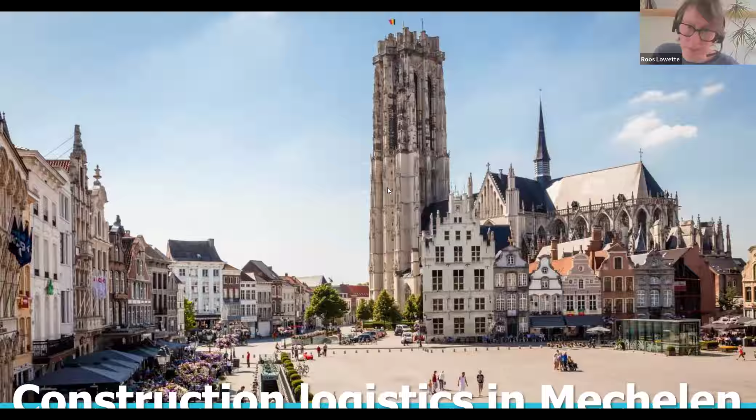Thanks everyone for being here. Esmée and I, we will be talking about construction logistics in the city of Mechelen.

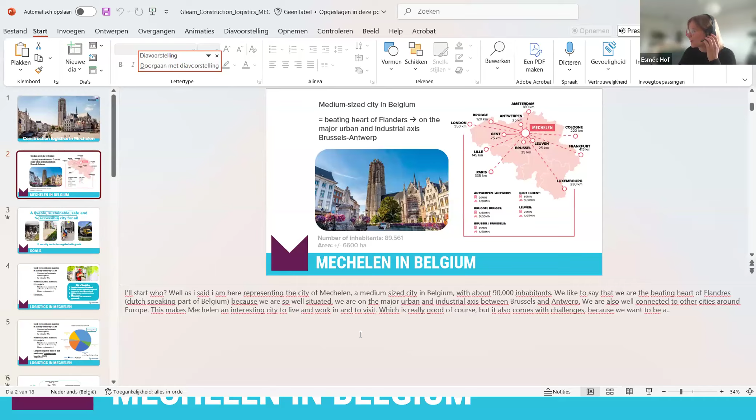You're seeing not the presentation mode right now, are you? I think it's slightly bigger than the screen, so it might not be presentation mode. Let's see. This should be it, right? Now it is, yes. Perfect. Let me first tell you a little bit about Mechelen. It's a medium-sized city in Belgium. We have around 90,000 inhabitants. As you can see, we are situated in the middle of Roos, Flanders. We don't see Roos, we don't see the next slide. We see the first page still. Oh, you do? That's strange. Because I see the slides that I'm talking about. Maybe try sharing it again. Do you see it changing now? Yes. Okay. Yes. So as you can see, we are situated in the middle of Flanders, the Dutch-speaking part. We don't see the presentation mode. We're also sorry. We see the really? Yeah, that's good. Okay. That's sorry for this. Let me stop sharing and start over again. Should I share the screen? That's also fine.

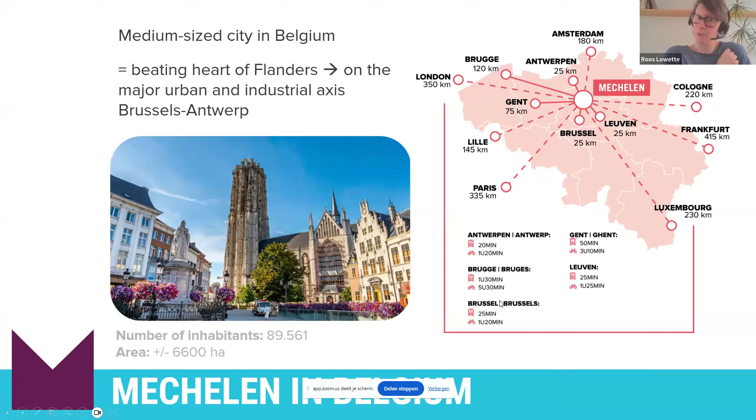In any case, we are on the major urban and industrial axis between Brussels and Antwerp. And as you can see, also well connected to other cities, not only within Belgium, but around Europe, which makes Mechelen quite an interesting city to live and work in and to visit, which is nice, but it also comes with challenges. Because as you see, we want to be a livable, sustainable, safe, accessible city, but it's not always easy to find the right balance because at the same time, we also want to have new buildings. We want people to be able to have a drink on our main square. We want people to be able to do shopping. So a lot of goods need to be supplied as well.

Yes, Esmée. So that's why in Mechelen we focus quite a lot on sustainable urban logistics. And we have as a city a goal to have zero emission logistics in our city center by 2030. And we have a main focus so far on e-commerce and the delivery of restaurants. Through European projects, we try to make these logistic streams more sustainable. And we do so by trying to avoid the kilometers, as you can see, shift those kilometers that cannot be avoided to more sustainable modes of transport. Ideally, shift them to zero emission vehicles. And we want to stay connected with all stakeholders that are involved in this process.

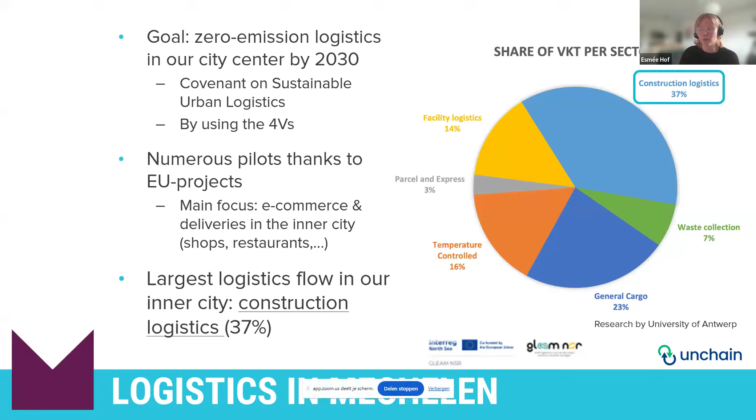However, when we look, well, we noticed in the data that a lot of logistics entering our city could be attributed to construction logistics. So, as you can see on the pie chart on the right, about 40% of all kilometers traveled in our inner city can be linked to construction logistics. So as Roos said, we've done a lot of pilots focused on e-commerce and deliveries in the inner city. However, within construction logistics, we did not have a lot of context, and that's why we are focusing on it. Because it's a large portion of logistics in our inner city, we also, of course, see the impacts of construction logistics. Again, a few data.

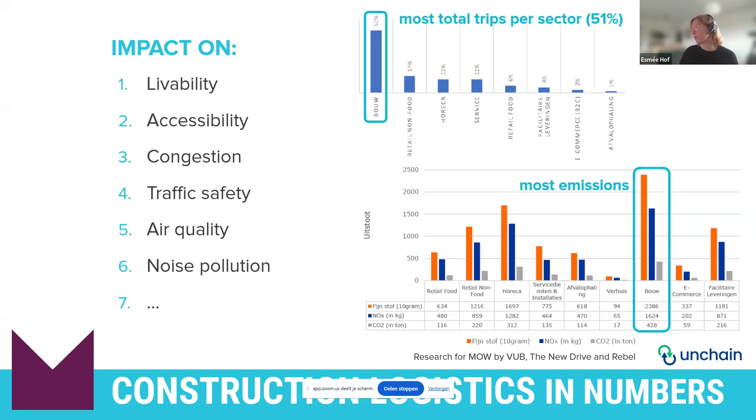We see a lot of trips can be attributed to construction, and as a result, also a large part of the emissions in our inner city are linked to construction. It has an impact on livability, accessibility, congestion, traffic safety, air quality, and noise pollution, among others.

When we look at some examples in Mechelen, just some photos that we took, you can see that often construction materials are stored on the public domain, which is not often a big problem, it's just a bit of a messier look to our city. But as you can see in the example in the middle, you see goods and a van stored on the sidewalk.

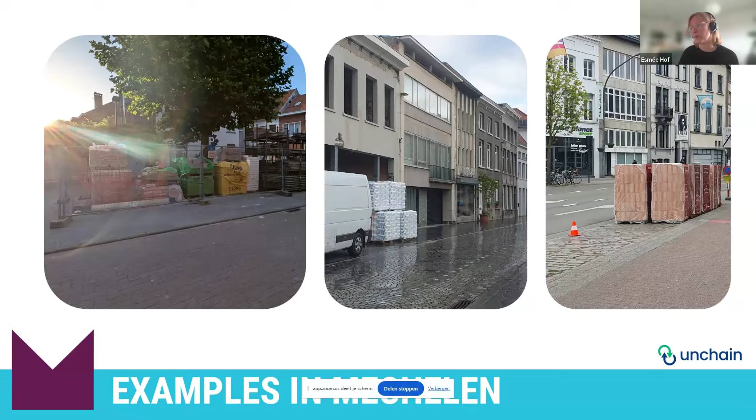Of course, if you don't have any problems moving around, that's maybe just a bit of nuisance. But you can imagine someone in a wheelchair or someone with a stroller has to go out of their way to avoid those materials. Also with loading and unloading, we see that it causes some obstructions.

You can see the same road here again. It's one of the main roads going into our city, which can be quite busy and is quite small as well. We have a very historical medieval city center. And you can see in both instances that the cyclist and the pedestrian has to move in favor of the deliveries being made in traffic. Of course these goods have to be delivered, but we feel like there has to be another way to make it also more safe for pedestrians and cyclists.

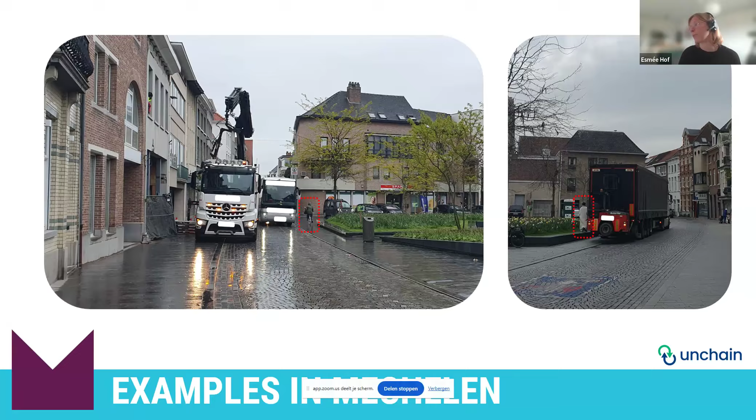However, the construction sector is, of course, essential to a city. In our spatial policy plan, we have written that we want to facilitate a strong growth in urban housing supply. So as Roos said, we have about 90,000 inhabitants right now, but we consider a future with 120,000 inhabitants a possibility. And that means, of course, that we have to have additional housing, but also additional facilities like shops, sporting centers, supermarkets.

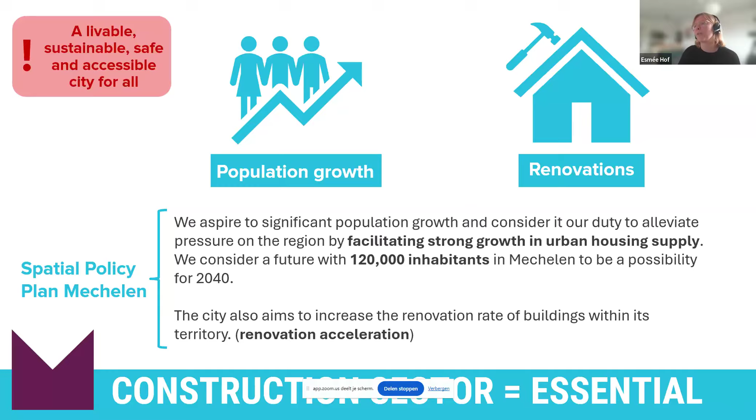And of course, we also want to increase the renovation rate of buildings within our city, so renovation acceleration. And all this means, of course, also more construction logistics in our city. But the question, of course, remains: how do we keep this balance between this construction logistics that has to happen, and a livable, sustainable, safe, and accessible city for all?

And thanks to 2 European projects, we are able to try to find a solution. There is Unchain and there is GLEAM. And they both help us as a city to investigate the construction logistics reality. Who are the companies in the construction business? What do they do? What do they need? Where do they come from? How do they enter the city?

Within Unchain, we launched a survey and we held 2 workshops with local contractors, interest groups, and construction retailers. And what we found out was that these companies are currently focusing mostly on more sustainable passenger transport, so for their employees, but that they still need to make significant steps to make the construction transport itself and the construction machinery more sustainable. They mentioned high costs and a lack of space as main bottlenecks currently.

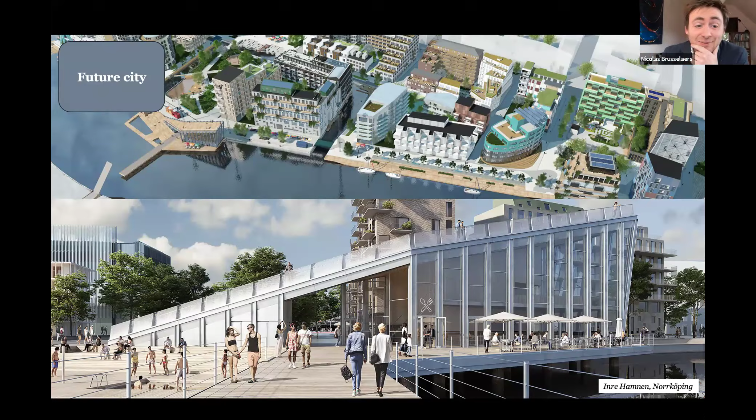However, during the works, construction logistics is inevitable, and that's then the less sexy picture that you typically see, which has an impact not only at the site itself, but on multiple layers around the site and the city as a whole, leading to vast amounts of disturbances, congestion, air pollution, and so on.

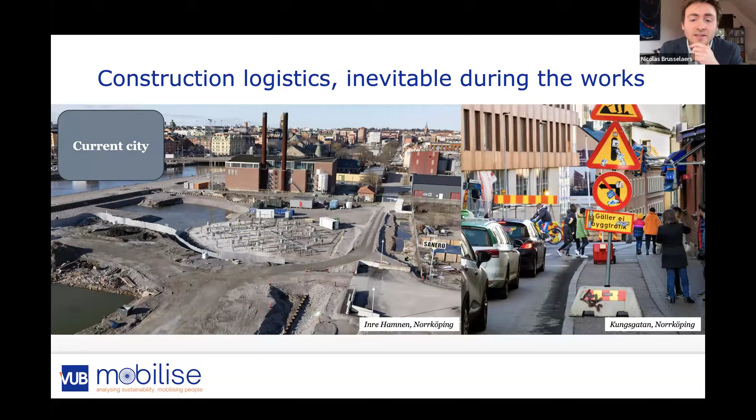And like you also already mentioned, that problem is further amplified the more simultaneous projects are running in a city. Cities typically focus on the current problems and the future state that they want to achieve, but in this transition phase we still have a term that we coined the planning gap. How do we reach that future state?

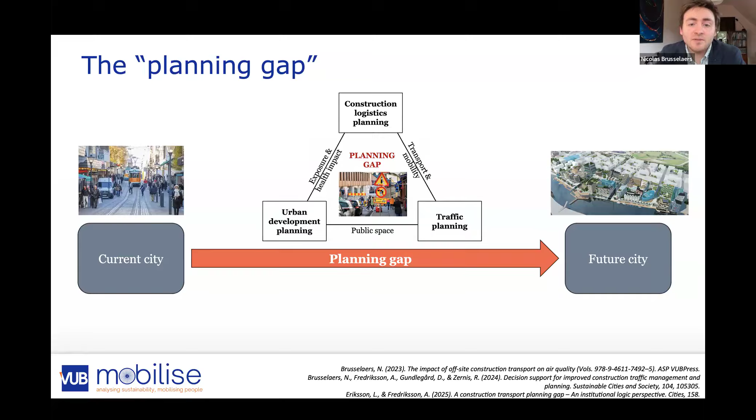I organized this presentation around three pillars leading to that planning gap, namely construction transport planning, traffic planning, and urban development planning. Without a profound understanding of how to solve this planning gap, it seems next to impossible to reach the targets set by 2030. So let's open together the three data sets that we used for our research in the last few years, starting with the one on construction transport planning.

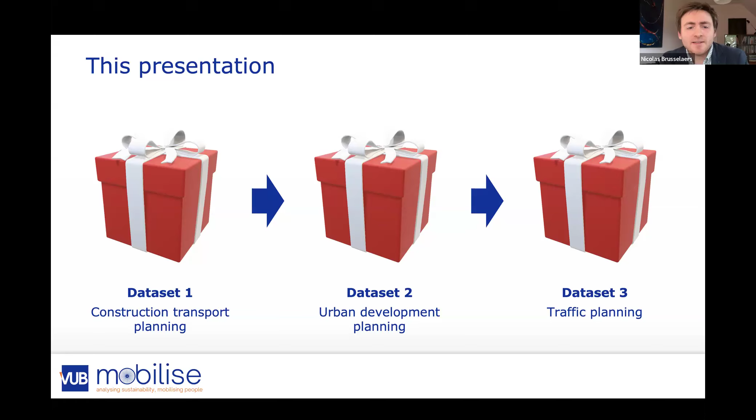So we got our hands on the onboard unit data set - GPS trackers that were implemented in Belgium in 2016, if I'm not mistaken, for taxation reasons, for the kilometer charge. That is a tremendous data set, collecting a lot of calculation variables on the vehicle type, the Euro norm, and so on, and a location every 30 seconds for every truck that is driving in or through the country of Belgium.

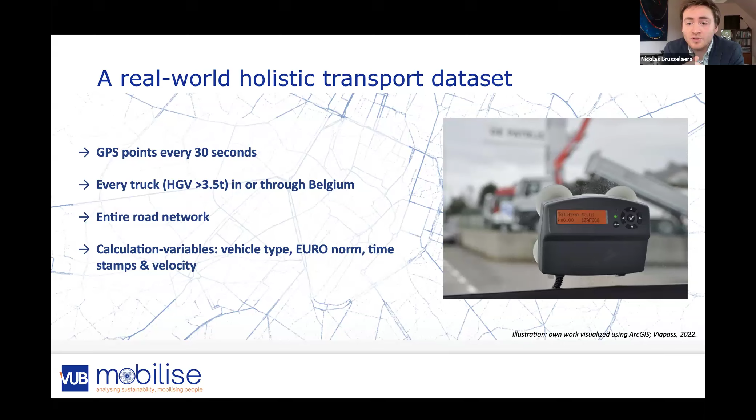And so with a bit of algorithmic development, we can see where each truck is driving in the entire country of Belgium and then translate that to a sustainability assessment, especially with regards to the transport sector.

And here we did the analysis for the city of Brussels, and we saw that in fact over a quarter of all the trucks, all the vehicles over 3.5 tons that are driving in or through the city are related to construction, carrying a massive burden, a massive impact.

We are speaking here about 45,000 euro of daily external costs, or over 1 million monthly. And it's still a sector that is heavily reliant on heavy truck trailers, so in the segment of 34 to 50 ton.

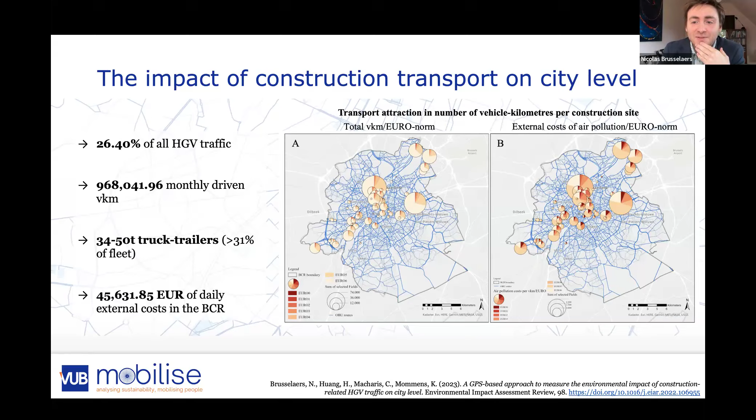We can pull this analysis also on the national level, and we see similar results: 1.5 million in external costs daily engendered by the construction transport sector. So that is a bit what we know.

Now, if we combine it with something else, with urban development planning data sets that we also have, we collected more than 200,000 construction and renovation site records in the city of Brussels. We created a proxy on neighborhood level for construction material demand, which we used to calculate optimal

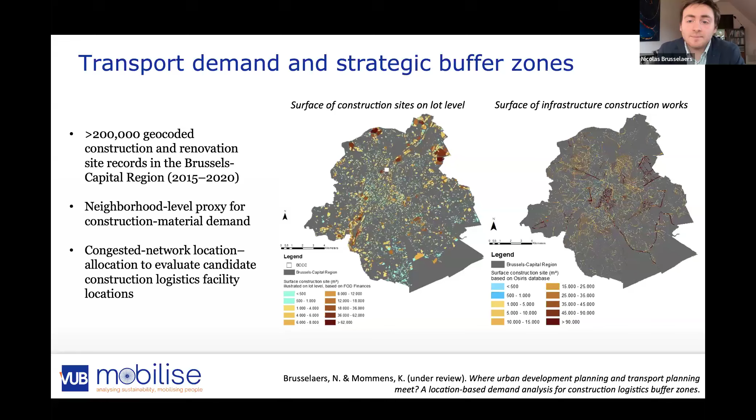strategic buffer zones or logistics facilities to optimize transport flows in and through the city. This led to a location analysis for logistics facilities, for one construction consolidation center, or two, or three, or four - strategic buffer zones where material demand will be highest and where it would be smart to position such a consolidation center.

And by the way, you see here that the white dot is the first construction consolidation center implemented by Mark a few years ago, and that is very close to the optimal point that we also reached in our analysis. Something that can also drive certain industry and policy decisions.

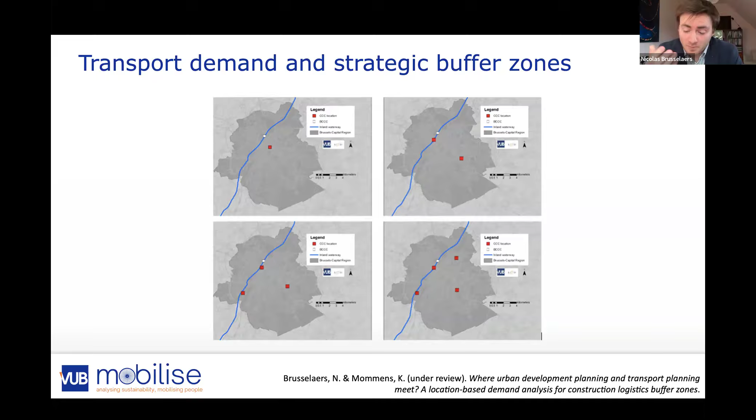Now regarding that, because we are talking about historic data, it would be nice to have an idea of future demand, which currently is quite complex because of the variables that influence transport demand and construction demand. And that's where traffic planning comes in.

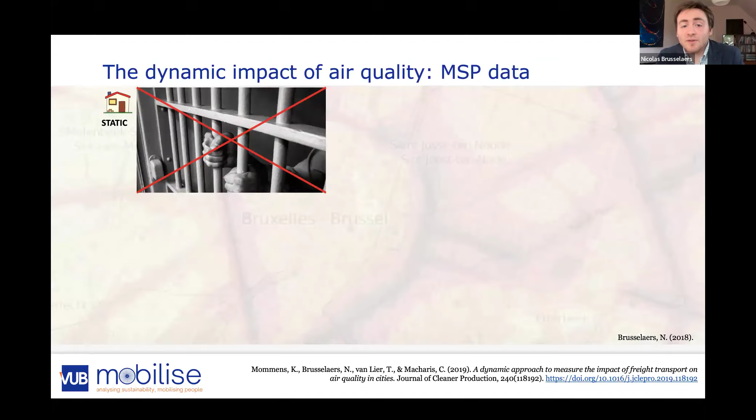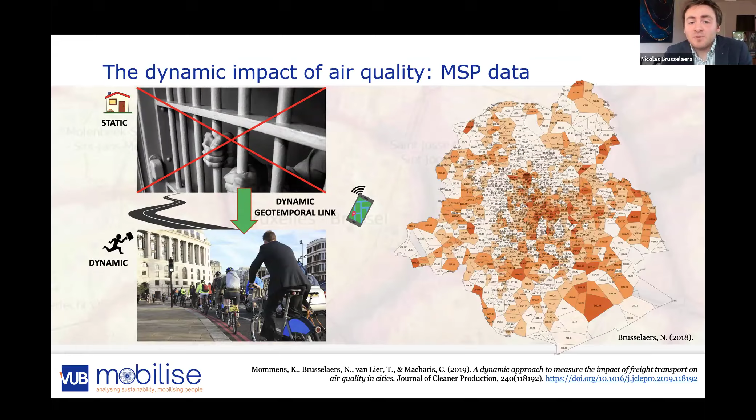Traffic planning involves personal mobility, which you can capture thanks to mobile service provider data, telecom data. Everyone is carrying a phone and everyone is tracked, albeit in an anonymous way. But we know at a certain point how many people are connected to a certain cell tower at a certain location and time.

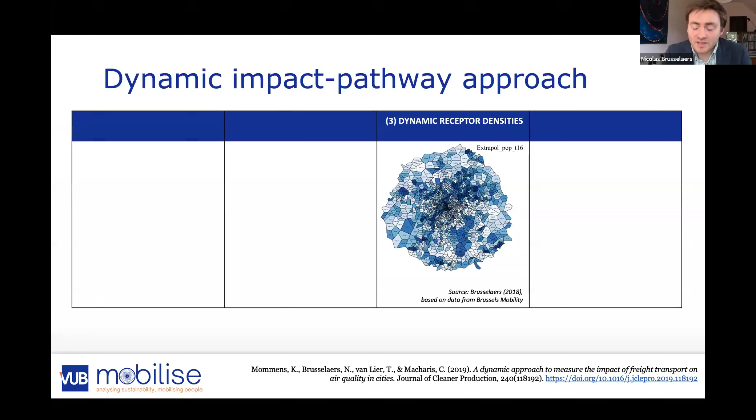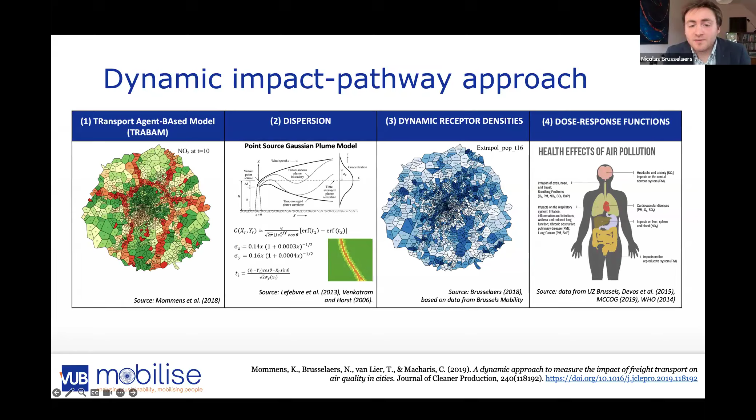And so if we map all those dynamic receptor densities in time and space, and overlay it with a dynamic transport model with dispersed pollutants, we can know what is the impact of construction transport on gender-specific and age-specific people.

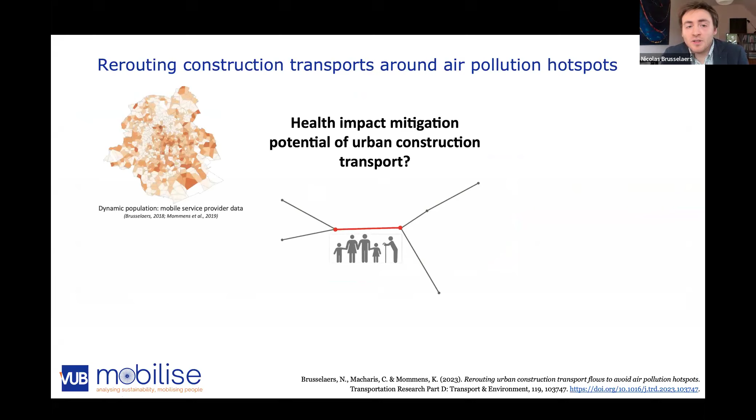So how can we reroute existing or inevitable construction transport around air pollution hotspots to avoid elderly people, young children, and so forth. For that we use the data sets I showed before - the mobile service provider data, or the onboard unit data tracking construction-related trucks.

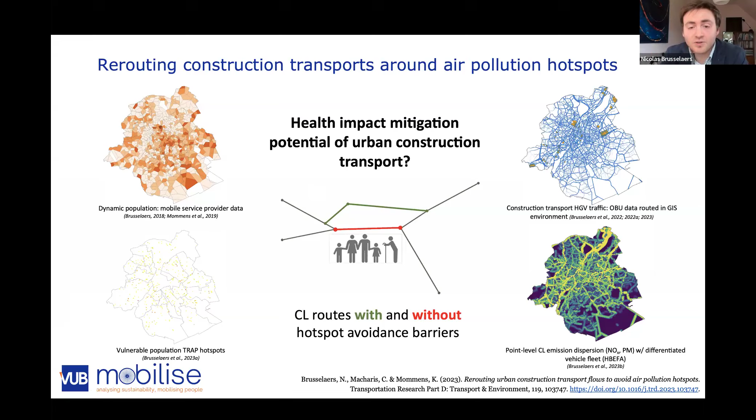There were many results from that study, but a logical one is that if you reroute certain trucks around dense hotspots, you drive more vehicle kilometers, resulting in a higher absolute emission of 5%. However, you drive in a time and space where there are few receptors present, so you can significantly lower the actual inflicted health costs.

Of course this stays a theoretical analysis, but it shows that different is also possible.

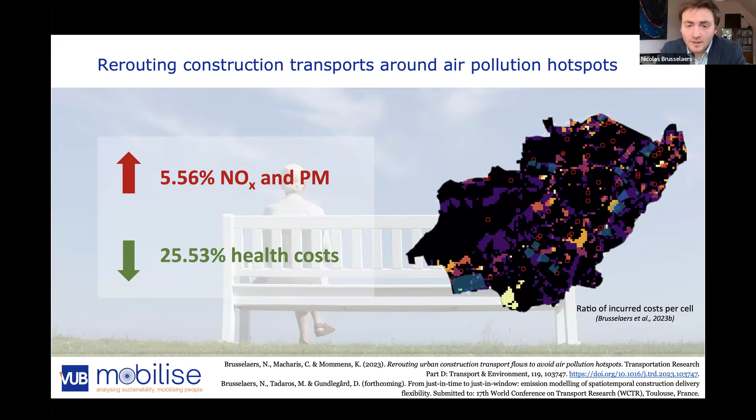So what lies ahead? If we take all these data points and analyses, it's actually a smart governance concept that we developed as part of a European project a few years ago, allowing us to drive certain policy recommendations on multiple levels - on the strategic level for a city, but also on an operational level.

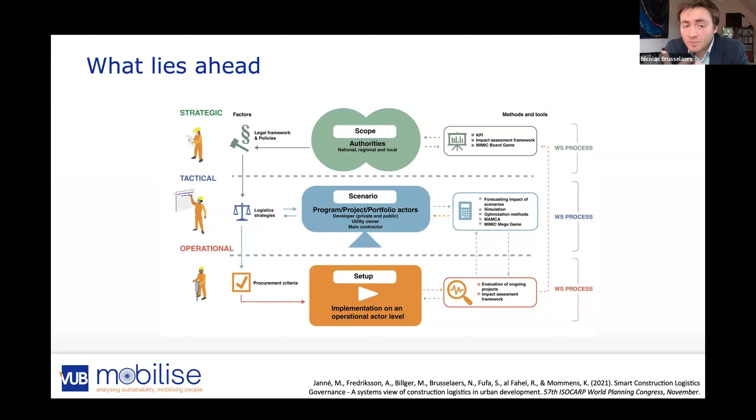And that is also something that was used in the framework of Renolution, the renovation wave in Brussels, where that framework was then translated to the Brussels context.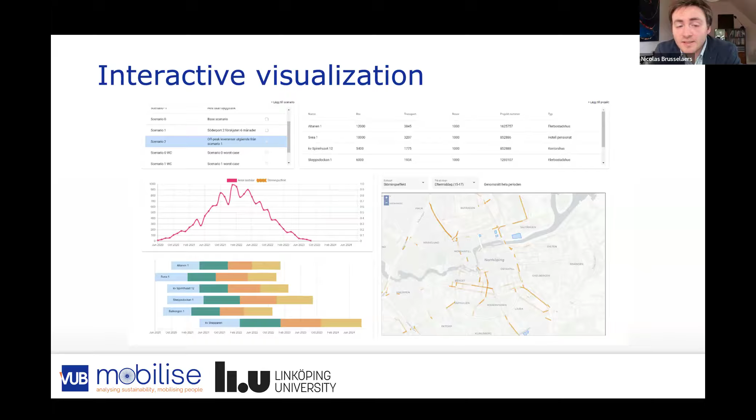We can then go from a 2D model to a 3D model, and ultimately - which is what we are currently doing - move closer towards a digital twin system. So what you're seeing here on the video is actually not actual footage. It's the city of Norrköping that has been entirely recreated in a digital environment. This is all rendered.

The city of Norrköping is roughly the same size as the city of Mechelen, to give you an idea. And here they are going to build a brand new train station as part of the Ostlänken project, a new railway between Stockholm and Göteborg.

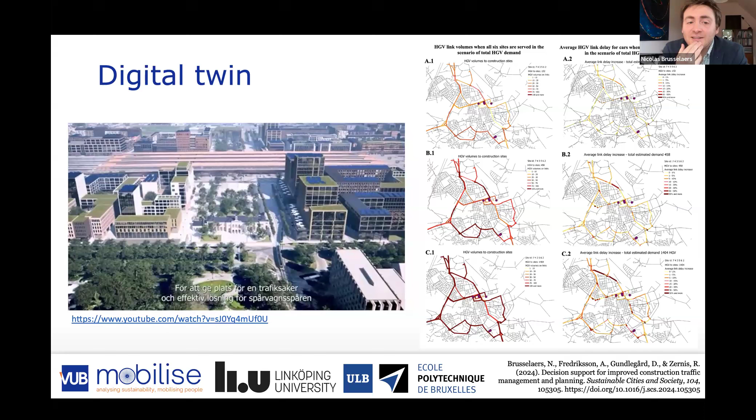And so that gives rise to simulating what is the traffic impact of the construction transports that need to go to and from that infrastructure project on the rest of the city. And later, when the project is developed, what are the benefits in terms of mobility and transport flows?

So in a nutshell, an overview of certain data that can drive certain policy decisions. Our research group is focusing on a few pillars, but the overarching one is zero impact construction logistics planning. If you have any questions, I'm happy to take them, or feel free to send me an email.

Really nice, thank you so much. I see we already have a question from Michael. He's interested in knowing how you differentiate between vehicles used for construction transport and other types of vehicles.

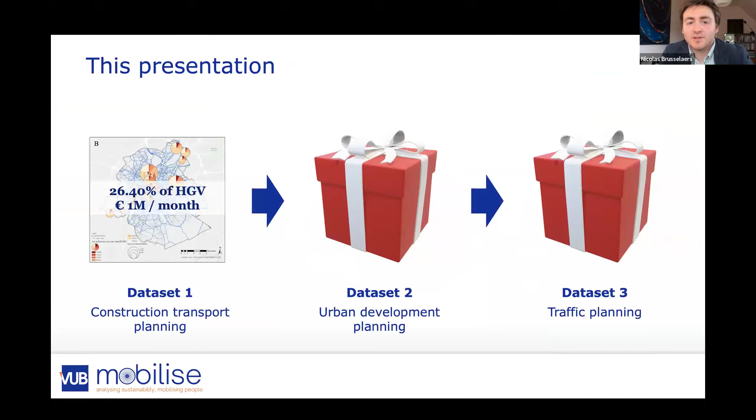Yeah, it's a good question. The easy answer is that we developed two algorithms to filter the construction transport from the rest of the data set, based on the location of the construction sites themselves. We leveraged the unique nature of the construction supply chain, which brings a lot of materials and generates a lot of transport at a very specific point in space and time. We used those characteristics to determine which trips are related to construction sites, and which are not in relation to large construction projects in the city.

Thank you. So space and timestamps mostly. Okay. Michael, if you have any follow-up questions, feel free to intervene.

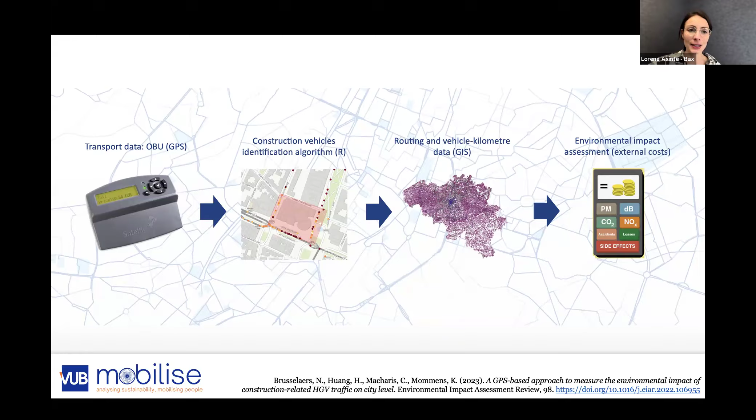Thank you, it was a comprehensive and very impressive approach, I have to say. Thank you indeed. I was also wondering if the visualization tool is available online.

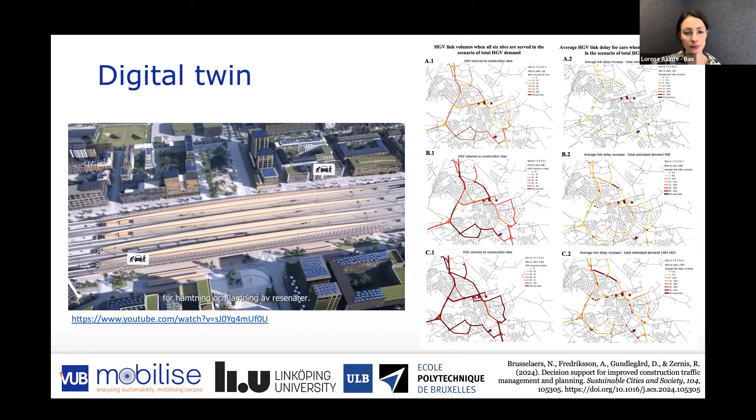The visualization currently is not. I think especially for the full representation of the city of Norrköping, that is something I can put you in contact with, a visualization center in Norrköping. They would be more than happy to show you or guide you through the possibilities, but it's not an online tool.

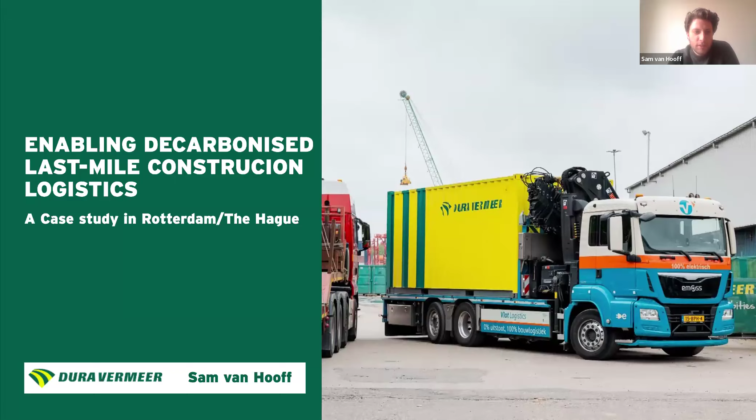All right, good, perfect. I was invited to present to you something about decarbonized last mile construction logistics. My name is Sam van Hooff. I work as a sustainability manager at Dura Vermeer, one of the 5 largest contractors in the Netherlands. We do various activities, and I work in the renovation and transformation branch. I was asked to tell you about a project we've done regarding smart logistics and electric transportation.

So this is our case study, called the Witte Anna, the White Anna. It's a large residential tower, and we renovated almost 170 social housing units situated in the city center of The Hague, right next to the train station. We renovated kitchens, toilets, bathrooms, cleaned up the facade, and installed new windows and window frames.

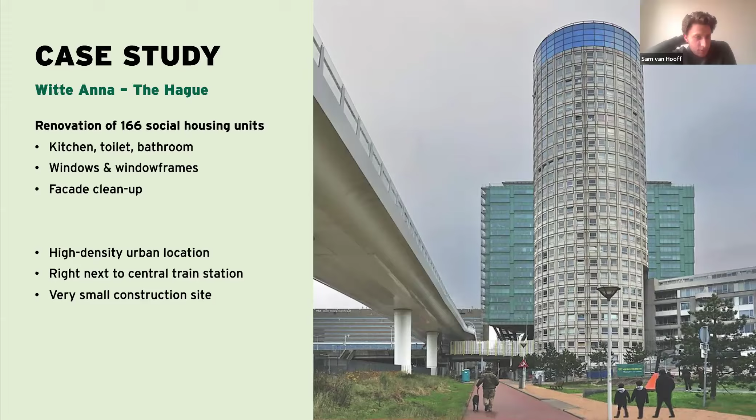We had a couple of challenges regarding this project and location. First of all, a high density urban location, so it was difficult to reach, and it also had a very small construction site, which I'll show you later. To tackle this project, we used our construction hub, a terrain located about 55 kilometers from the construction location, which we call the Urban Miner.

It is a construction and circularity logistics hub, and we have 3 basic activities here. One is logistics, so storage and shipping of building materials. There's also harbor access, so we can ship materials via the water. There's recycling activities of asphalt and concrete, and circularity activities: a storage space and an upcycling space for used building materials so they can have a second life, and a sawmill so we can adapt these materials a bit.

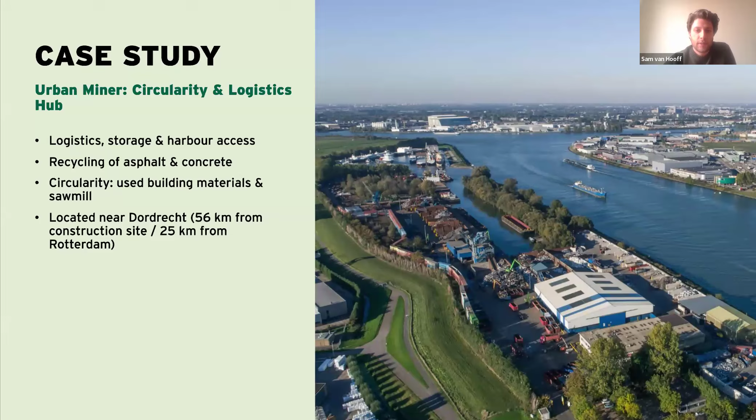Basically, I'll first tell you a bit about how we would normally tackle this project. This is the building site, and as you see, it's very, very small. Normally at a construction site like this, we would have about 25 or more subcontractors, and each has their own building materials, personnel, company-specific planning, space occupancy, and safety measures. So it's quite complex to deal with all these different actors, as you can imagine.

In that situation, we would have about 8 large diesel trucks per week coming in from various companies with different building materials, and also various smaller vans with personnel. It's quite difficult in planning because, say, some goods are delivered late and the entire planning shifts for a week—you have to call 25 companies and tell them to be a bit later. Also there's very little capacity for the storage of building materials, as Roos and Esmée showed earlier; that's basically impossible here.

Waste collection was also quite difficult, so those were our challenges. How we solved that is we used the hub as a buffer location, which Nicolas just spoke about. So all our contractors stored and supplied their materials here, instead of doing various small deliveries throughout the project, they did one big delivery at the start.

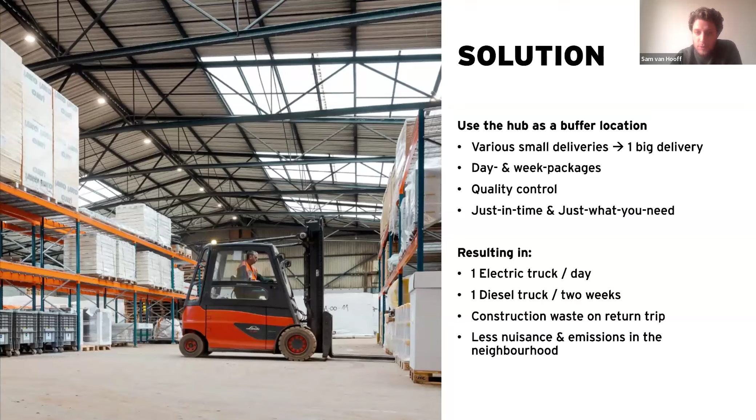So that worked really well for us, and our building site colleagues were very happy with it because they were very much in control. They really could take ownership of these logistics.

So we had a software solution for planning deliveries and returns. We could plan when the truck had to arrive, what exactly was in it. And for example, if the planning shifted one or two weeks, we could easily change that. That is not usually the case in a construction project, so we were very thrilled about this way of working.

It comes with a couple of challenges though, so I'll talk you through those. Of course, charging facilities for the electric truck - we have them at the hub, but they also need to be sometimes present at the construction site, because sometimes the truck doesn't have the capacity to go back and forth. So that was a challenge.

And the thing with this kind of logistics hub, it sounds really efficient, but it's not always the case actually, because what you're doing is touching everything twice. And if you touch something twice, you also have to pay for it twice. So that's quite complex actually.

Another challenge was the capacity of the electric truck. As you can see here, it's a big truck, but it's not huge, so not everything could fit on it. Also the crane that's attached to it has a certain limited capacity, so we could not use it in every case.

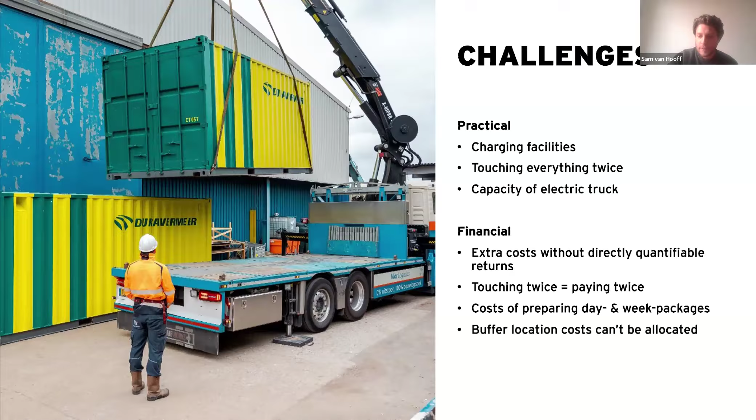And we had them delivered one time at the hub, and then it was repacked in day and week packages, and then brought to the site. So actually it was more expensive to do this, although it looks really efficient. We are not really able to allocate these costs yet anywhere, even though there are substantial benefits for the environment and for the people around this building site. But this is our challenge, what we're dealing with.

So my questions to you are: how can we work together to make the numbers that Nicolas just presented somehow come back to these costs, and how can municipalities contribute to these issues? Thank you.

Thank you so much, Sam. That's indeed a very good question, and I think I've also put it in the chat. We have a few attendees that work for public authorities. I don't know if any of you would like to respond. I was tagging Jos because we've been chatting about procurement for quite some time, but anyone else is welcome to respond. And I see Mark also with his hand up. So go ahead, Mark, and then Jos.

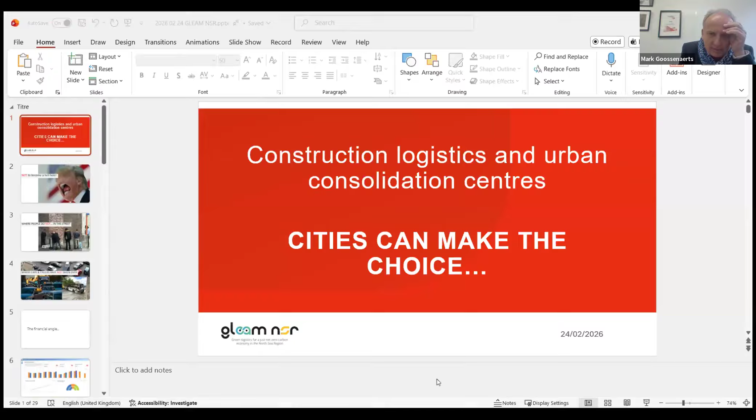Yes, please. Okay, I took over your title, so that's good, eh? And for those who have already seen my slides, I think that's Esmée, I'm sorry, but it's a bit the same as last time, but don't worry.

In Belgium, we make studies about what congestion costs. I think it was mentioned before, but our total cost of congestion in 2025 was 5 billion euro. And 5 billion euro, that's a lot of money.

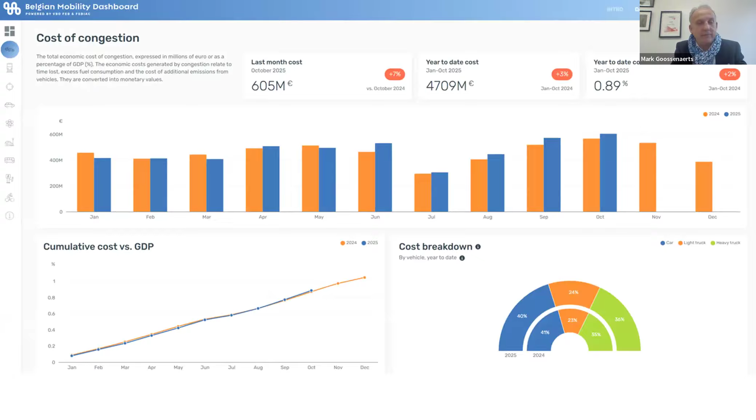When you look at the cost breakdown, a lot of this 5 billion comes from transport. Goods transport represents only 17% of the total traffic, but they stand for 60% of the congestion cost. And construction-related transport stands on average in Belgium for 30%, in Mechelen it was even 37%, of the goods transport in a city.

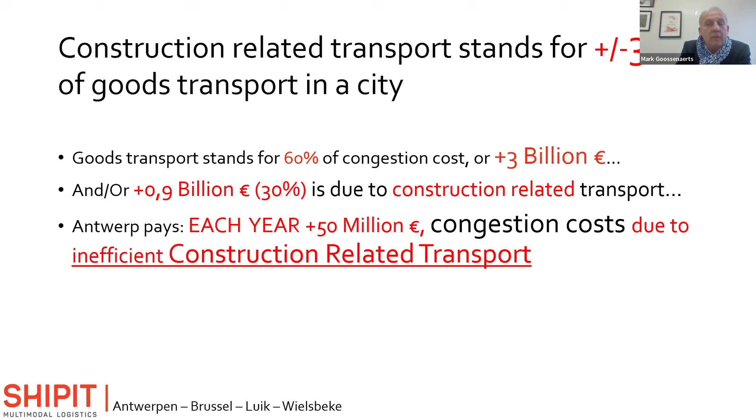We see that goods transport costs, logically, roughly 3 billion euro per year. And almost 1 billion is due to construction-related transport, which is 30%, of course. And you look at a city like Antwerp, for example, each year they spend 50 million too much on congestion costs, which is due to the inefficient construction-related transport.

Just to give you an idea, 11,000 trucks daily come into Antwerp, and 18,000 vans come into a city like Antwerp. 30% of the trucks is related to construction, but 49% of the vans is related to construction.

The vans are typically the transport means for people, and we see that about every subcontractor is using his own little van to get into the city and to deliver people there, and they go back and forward to different stores to buy something instead of being mobile and doing it a little bit efficient. They use their small vans to drive around Brussels, and they're not being efficient at all.

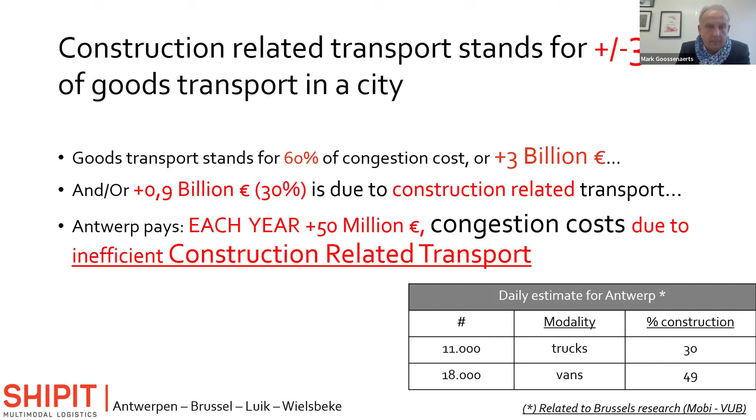When you look at the human angle, what we see on the construction side is that a normal person or a person in the normal industry is occupied for 80% of his time with efficient things.

Efficient things, that's hours that he's paid for versus hours with added value. So 80% of his hours are with added value. I don't make you guess how much that is for the construction-related industry, but only 30% of what a person is doing on a construction site is really adding value. That's not really a lot.

And the rest of his time he spends walking around. So it's a very healthy profession, I think, when you walk 8 or 10 kilometers per day, but that's not really the intention, of course.

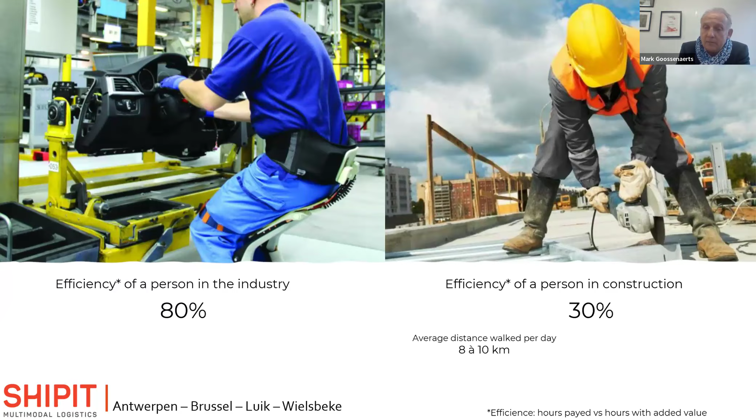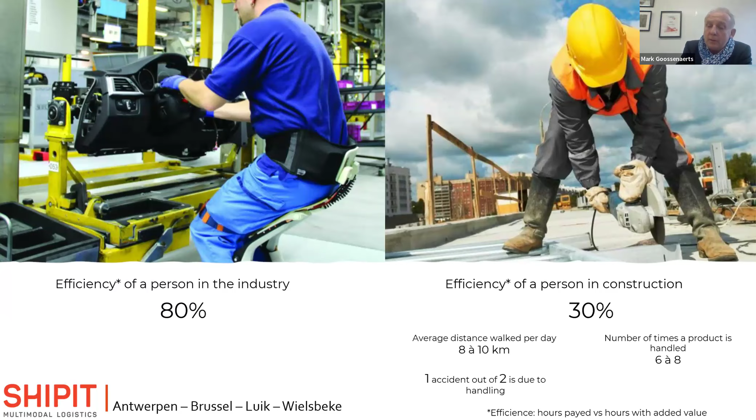Products are handled 6 to 8 times before they are placed. So it's not a coincidence that 1 out of 2 accidents is due to handling and that people suffer from dorsal problems.

So that's why we created the HelloFresh for construction logistics. I don't know whether you know HelloFresh in Holland, but I suppose you do. What is the HelloFresh? HelloFresh is you use exactly the food you need at the right time to produce a meal for your family. So that's what we have to do, but what we have to do in a construction site as well.

Not everything needs to come at the same time at the construction site. We just need to bring the things that we need at the right moment, at the right place. And that's why we created the Brussels Construction Consolidation Center.

On the top layer, or on the top truck, is delivering exactly the right thing, when he's needed, exactly what he has to deliver, on the right moment, on the right day. That's something we are not going to change.

But the rest, you see that there's different goods coming to a construction site normally, and they are put there somewhere, to stay for a while, and after a while they disappear when they are expensive or they get damaged or whatever.

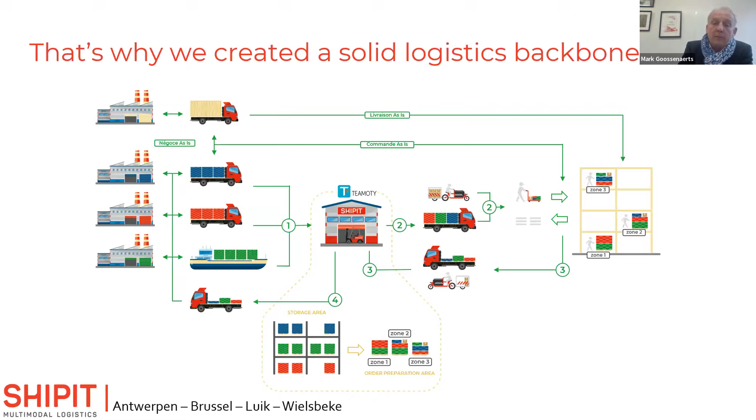But you can bring goods also with a truck towards a construction consolidation center. That's what the former speaker, Sam, was doing as well. And you can bring them there via boat or via truck. And I will go just a little bit further into the truck transport.

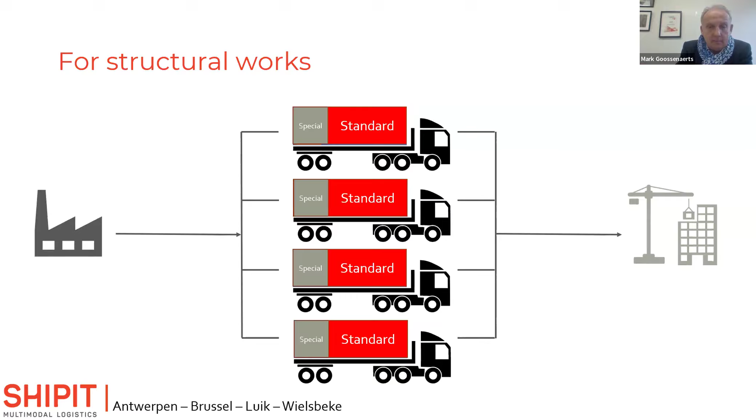We saw on a construction site in Brussels that they are bringing 4 trucks each day from out of Holland to the construction site, partly standard material produced in large quantities with a low number of SKUs, and partly special material. That's 4 trucks a day, about 80 trucks a month. Let these 80 trucks per month be the equivalent of 1 ship, so we could bring 75% of the volume by ship towards the construction consolidation center, which is at the water, at the canal.

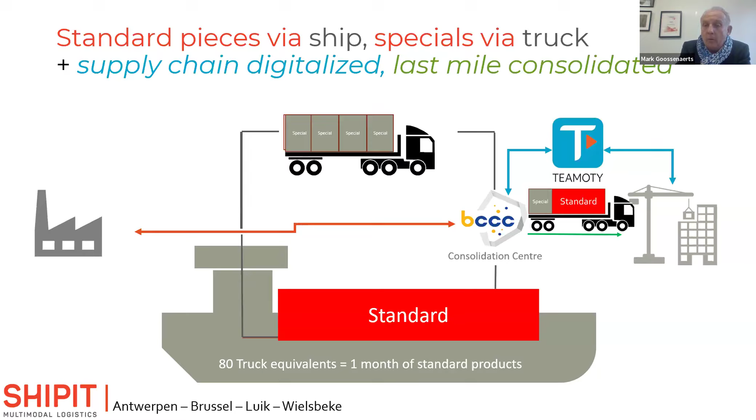Bring the specials also to the construction consolidation center. We reconsolidated the specials with the standard material. We digitalized the whole stream, and we brought at the right moment, at the right place, on the right crane, the right volumes that were needed for that day, or 4 times a day.

For the finishing, so it's not only about construction, raw construction at first, ruwbouw, but it's also about finishing - putting in the tiles on the construction site, the doors, the parquet, the bathrooms, the kitchens, and so on.

They are delivered now with 1 truck bringing something to a construction site, and that is put there somewhere. Most of the time it's a milk run done in the city, and we see lots of trucks arrive with 1 or 2 pallets on a construction site. For the rest, they are empty.

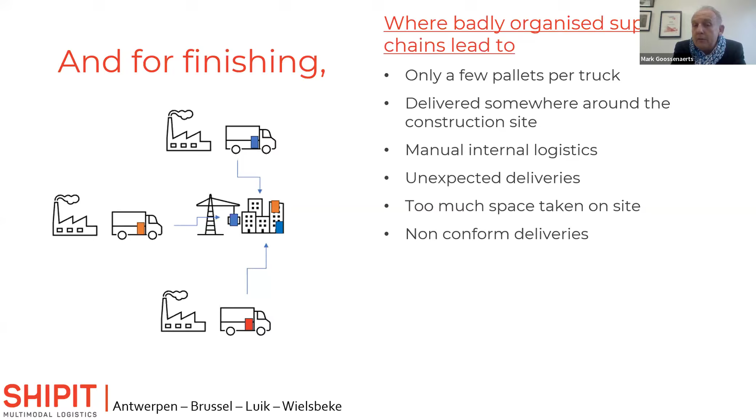So we see only a few pallets per truck delivered somewhere around a construction site because they don't have to use it directly. There's a lot of manual internal logistics without equipment, and unexpected deliveries - trucks arrive at the construction site without people knowing about it, so they put the material just somewhere. They lose a lot of time because they have to open the truck, whether it's full or not, look what's in it, and maybe it has to go to another crane to be unloaded. It takes a lot of space on site, and deliveries are often not conformed.

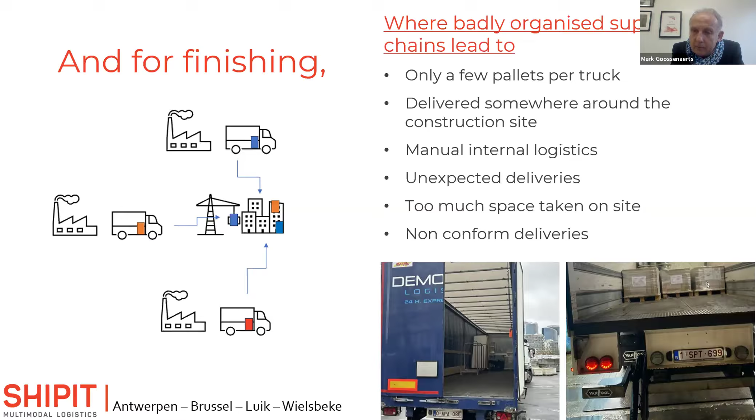What we saw is trucks like this coming on a construction site. When you look closely in the back of both trucks, you see 2 pallets or some douche panels and a few pallets in the right truck.

So what did we do? We reorganized these logistics. So everyone bringing the blue material, let's say that's the kitchen or the toilet pots, they come to us, to the urban logistics hub. They deliver everything there, and at the moment it's needed on a construction site, we bring the showers, the parquet, the tiles, or whatever. We bring them to the construction site. It is announced, it's digitalized, and everyone is expecting what we're going to deliver.

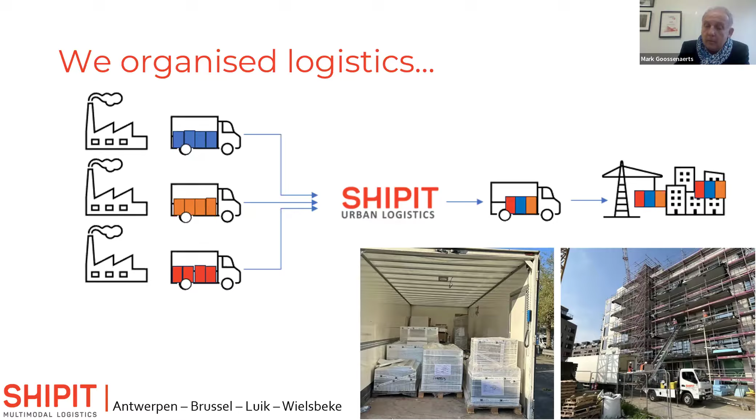So that's a full truck coming to a construction site instead of a half empty or more than half empty truck, and you see more than well-loaded trucks. The nice thing about it is that we are not going to deliver just at the construction site, but in the apartment, on the right floor, in the right room, where the goods will be used the next day. It's not just stored on the construction site, it's stored at our site, and then we bring it at the right moment, at the right place, where it has to be or will be used the day after.

We did this with a French company. We built together a fully integrated IT planning system, which is a sister program of the planning system that we have on lots of construction sites. It also connects with other construction planning systems on the construction site, making it possible to trace everything from its origin until it arrives at our hub, until it's unloaded, until it is delivered on the construction site. It's accompanied with pictures and these kinds of things, so really proof that it has been delivered in the right room at the right moment, and fully delivered as well.

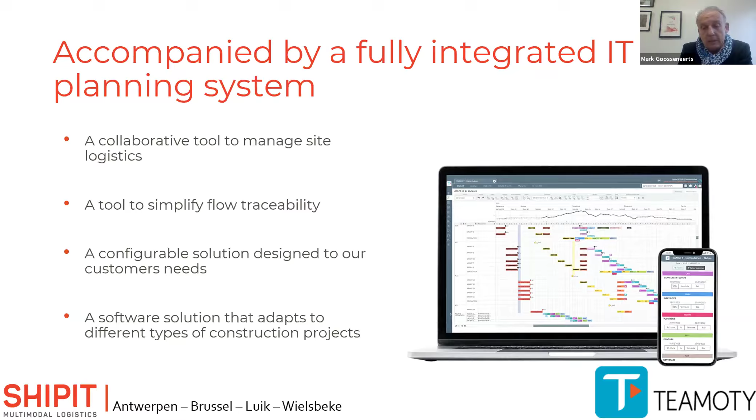We can use it on any project we want because it is freely adaptable. The plan of the construction site is on it. We can read the plan and see which site or which part of the construction site we have to deliver to, with different zones and these kinds of things. So it's quite performant. For Brussels, we have one urban terminal, out of which we can serve about 70% of all the construction sites within 30 minutes. It's a waterborne terminal, which gives us the possibility to load and unload ships of up to 4,000 tons.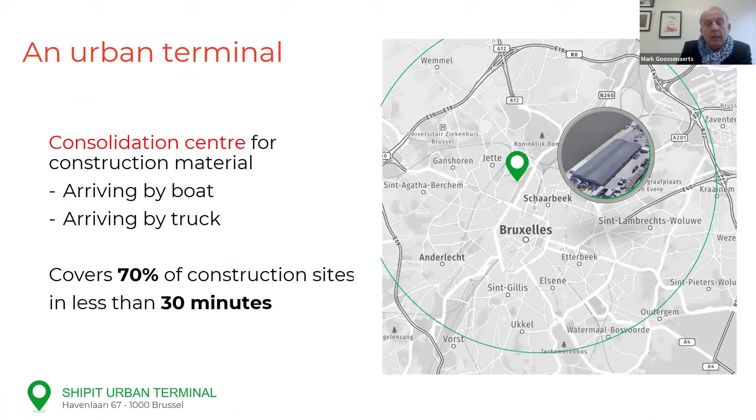Something very new, which we've been talking about already, started beginning of this year, in January. We started Reload, as in return logistics, avfal, déchets - it has to be bilingual here in Belgium - and we create small sorting centers on site.

This allows us, instead of recuperating waste, to make a recuperation of raw materials. Because we are sorting on very small quantities, we can keep our fractions quite pure. Pure fractions mean you have a lot more possibility to reuse material instead of recycling it. So downcycling or upcycling is a lot easier when you collect small quantities.

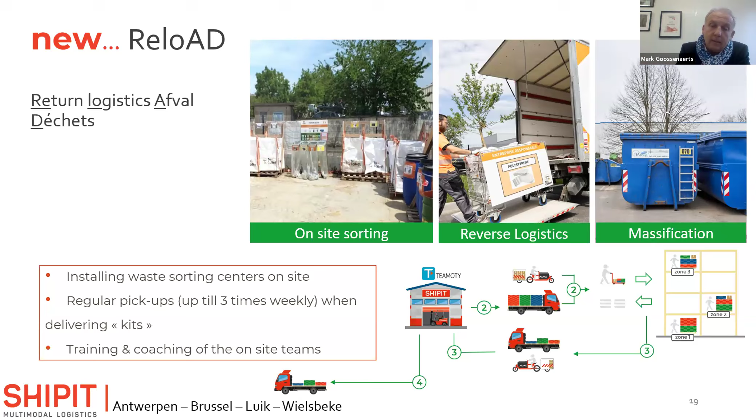You put them in a large container here in the construction consolidation center, and you bring them back to the producer. What you can bring back to the producer is recycled much finer than what you can find until now. It looks like this in reality, and it was really the first time for Belgium that this has been launched, and we were surprised about the success.

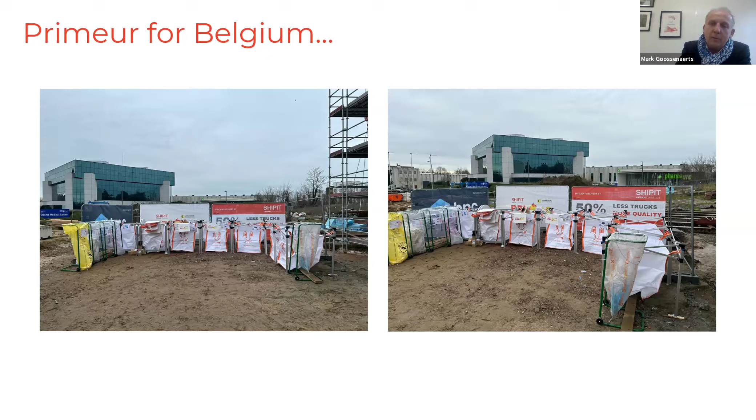The fractions we collect are quite clean and pure, and there's a lot of enthusiasm on the construction site to use these kinds of things. We have to train people and sensibilize them quite often, but people are really motivated to contribute to a better and cleaner construction site with this.

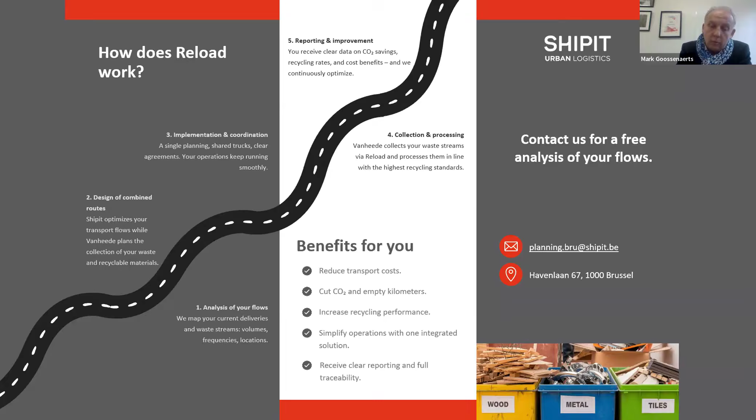I won't bother you too much with this, but we design with our customers what we are going to collect at their site. We can make an analysis based on research from different universities and also Build Twice, an organization in Belgium that does these studies. So we can analyze the site quickly, know what to expect, how to collect it, what kind of sorting center to put, and we can calculate in advance how much an entrepreneur can save using this system.

Well organized logistics on the construction site leads to 50% less trucks, 50% less CO2, 50% better quality, and 50% less accidents. That's why we do it as well.

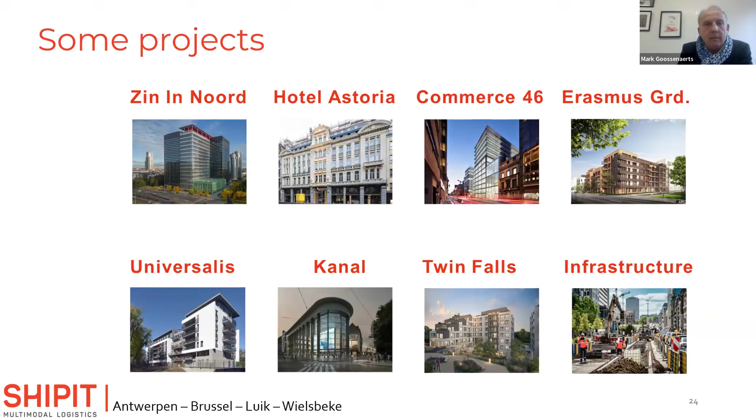We have done quite some projects in Brussels, not all full-blown, but a lot of infrastructural and structural works. Finishing is still quite new for Reload - we have one construction site active now for that - but for the rest it's both structural and finishing. I think we are about 10 active sites at this moment for which we are delivering.

We have quite some customers of which we are extremely proud. In a nutshell, we are a member of the Green Deal, and we won the 2023 Trends Impact Award for most sustainable company in the mobility category. We are quite a small company.

We have 10 owned ships, group revenue about 30 million, and we are quite okay financially. We have a small team in Brussels of four people and some subcontractors with which we do quite some work.